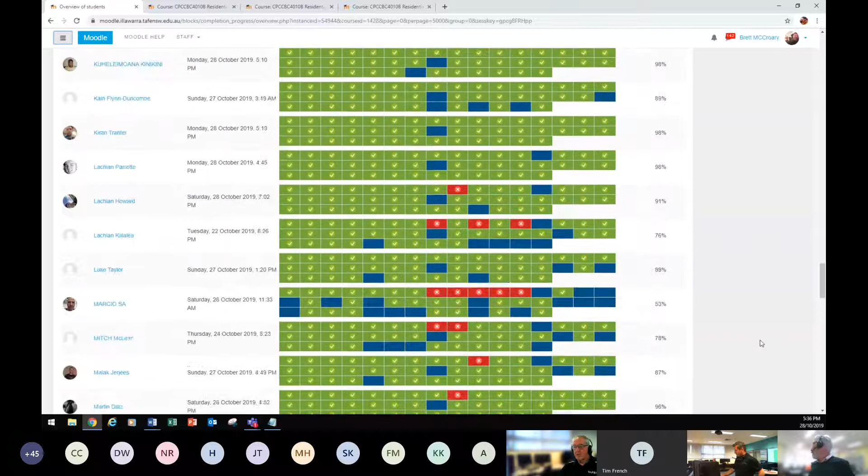I'm just scrolling down because I really don't like showing other students, but just so you get the gist of it, this is what we do. We go down and we look at the end of the year and we check, right? Then we also go into someone's access for their work, just solely them, and then we open up some of the learning activities and have a go at this. This is an example of a student who submitted something that went green.

Calculating live loads worksheet - they've just actually submitted the document and not done the work. Now that's great, the thing is it goes green, but that doesn't actually mean that we know it's done. It looks green, but we still go in and check it. Does that make sense?

And see those calculations - they're questions that'll be at the end of the year. So if you've done it, you're going to have a very good understanding and you're going to probably kill the test within a couple of hours. Those that haven't, you're going to be going, oh my God, it's green, but now I don't know how to do the quiz. Does that make sense, everyone?

Okay, so we actually see that. Yeah, those are the things that - I know a couple of years ago a student didn't do it properly, and he had to come back.

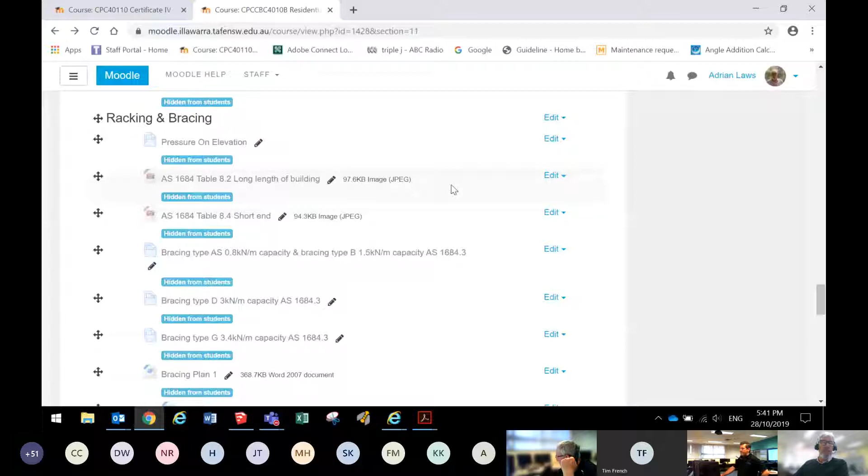So tonight we've got quite a few things I'm going to open here. I'm going to make available to you an actual calculation sheet that you can save into a file somewhere and get ready for when you're doing the quizzes for this unit. So at the end of the night, we will have done a few quizzes.

We'll look particularly at cyclones and some cyclone damage. I'll show you some information on some of the damage from Cyclone Yasi, I think it was, and a few others that we may have to be aware of if we build in some areas that are north of us.

So what I would encourage you to do, if you want to make it real quick and easy for yourself for the quiz, is set yourself up a little folder somewhere. You can see I've called this particular one Structures Cluster, and I would set yourself up a little folder somewhere on your computer for information that'll help you with your exam tips. So I think someone else has grabbed the screen here.

That's not me there. I think I'll just grab that again.

Set yourself up a folder that you can find quickly and easily for when you come to do your exam. You can right click anywhere in the white space when you're in a folder, then get yourself a new folder, and I'd call that 'exam resources' or something like that. That's where I'd put my Australian standards.

I've got all my Australian standards here, so you need to make sure that those Australian standards are active and they're not coming up as a green screen, ready for when you go to use them.

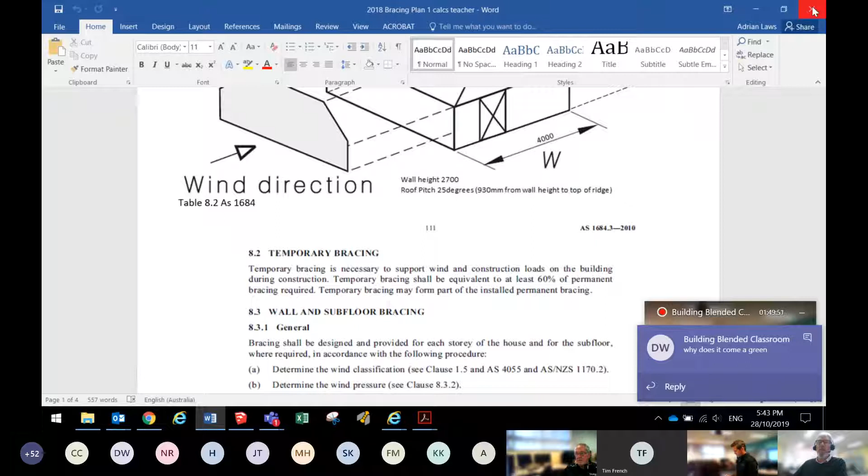I would also put in there any cheat sheets that you might have. I've got some cheat sheets, here's one for example. I'm going to give you this sheet tonight, and I'd be putting something like that in there because it goes step by step through how we can do our bracing and all those sorts of things. If you've got that handy and you get a question like this in the exam, which you will, then you're able to quickly use the calculations from the exam question with the exercises you've got and make it into something sensible.

Now, thanks for answering that question, Brett. Basically, there's a restriction that will come up as soon as you download an Australian standard, because they're designed to be the most up-to-date that they can be. So if you just download them as a straight PDF document from the website, they're going to go green after a couple of days.

If you look back at a few activities we looked at earlier, we said you can sometimes bypass that by printing the document to a PDF, and I think most people have been having some success doing that. Just click on print, and instead of sending it to your printer, send it to Adobe PDF or Microsoft Print to PDF. Most people have that on their computers, and then you'll be able to save it as a document that'll be useful for you.

So tonight, what I want to talk to you about is I'm going to open up a picture for you, and I want you to type into the chat box and tell me who lives in a house like this.

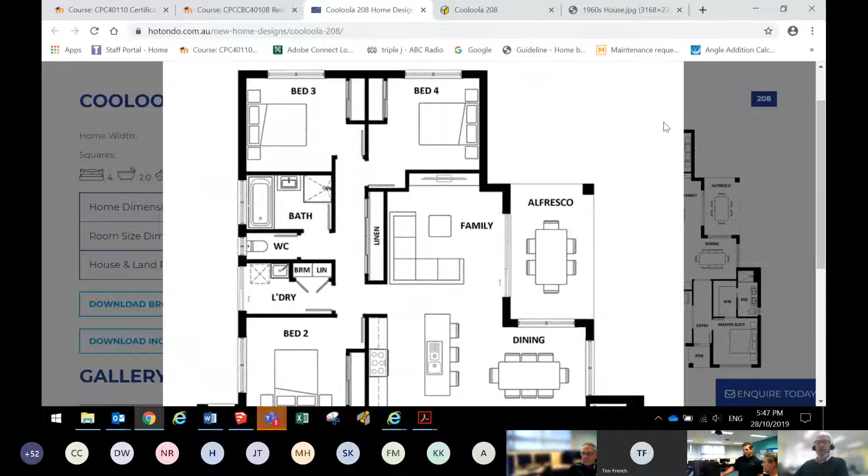Usually that's quite open on modern homes. We might fit some bracing down here, and a little bit in here, but then we're right inside the building, which can make it hard to stabilize the side of it. If we think about this building, the wind can come from two different directions across the building, either from the left or right, or from down this part of the building or from the front. So we have to put enough bracing in there to resist the forces of the actual wind blowing against it.

Now we're going to calculate tonight what the kilonewton forces potentially could be for a particular site somewhere in Australia of our choosing, so that we can design how much bracing we need on that building. But if you look at that building, it's quite different to the previous one I showed you. With this one, we've got lots and lots of spots where there's room for us to put bracing. This one here, we don't have many spots at all.

Look out the back here, that's all so open plan. How are we going to brace that from the wind coming against us this way? We've got a wall here we could potentially use, and a wall over this side. Potentially that wall in there could be a bracing wall, but it's quite hard for us to brace some of these types of buildings. So that's one of the problems we have when a building is built like this.

So let's have a little walk through this building and have a look at what it looks like. If you look around, you can see there's really not much wall space here. This one beside the garage, maybe. We come back into this room a little bit - and this is thanks to Hotondo, you can see on their home site here, Hotondo Homes. So there's not much room on the left-hand side of that window.

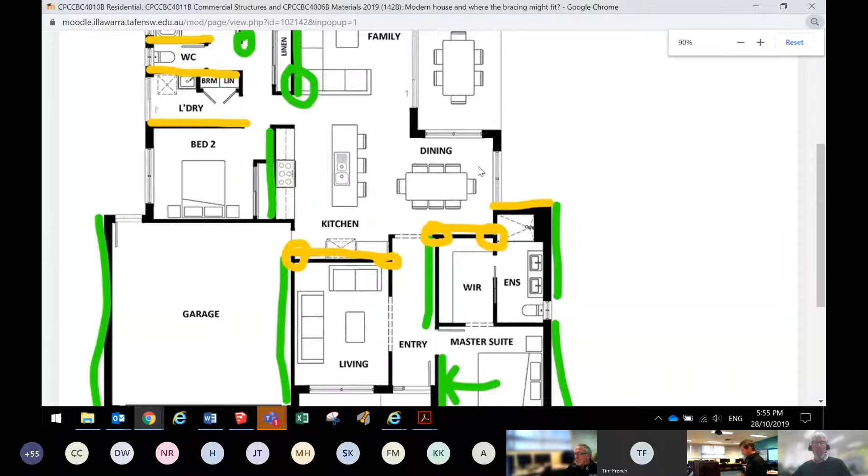Now if we look at the second lot of bracing we have to plan for with this job - I might be able to fit that all on one page - we'd have to plan so that if the wind is blowing left to right or right to left, these yellow walls could potentially be the braced walls. You're not allowed to have all your bracing down one end of the house and none down the other and say that's enough bracing. You can't go more than a certain distance without having some bracing, and this is quite a long distance here.

If we look back at the floor plan for this particular house, I don't know whether it's got measurements in there... no, there's no measurements in there. So we don't know how long that is or how much bracing we might need. That could mean we have to do something special here, because we can't have good bracing here and a bit of bracing there with a big gap in between - that could leave this part of the house weak and subject to failure. So you can see the situation we're up against is a chapter in the Australian Standard that's quite complex, with lots of different directions we can go when looking at wall bracing.

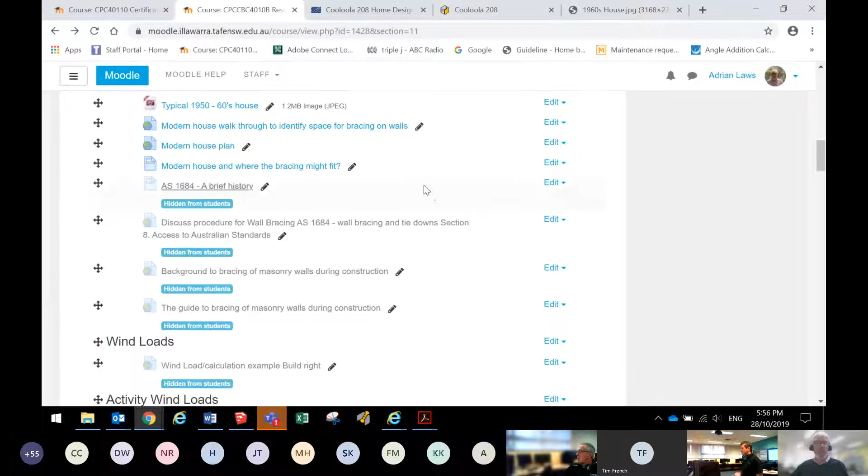Just going to increase the zoom on this once again, bring it back up to 100. So I'm going to show you the next item we're looking at here tonight - this is the brief history of Australian Standard 1684. I'll make that available to you all so you can see it. And anything to do with timber framing of a certain size, we can pretty much go to Australian Standard 1684 to find out things for.

And it's only going to apply to certain size buildings - buildings that are this size. That building there is okay, as you can see on the front. If we look at Australian Standard 1684, this is the type of building we can work on. We'll bring it up to speed here. It's going to be a building of those sizes: 3 metre maximum walls, 35-degree pitch, 16 metres maximum width of the building. So 16 metres is maximum, and that pretty much gives us the footprint of the building that 1684 is going to cover.

What happens if it's outside of that? Then we've got to get an engineer to specifically design it using the knowledge they've learned. Remember, engineers go to uni for 4 years minimum full time to learn how to do these sorts of things, whereas we're doing a course 3 nights a week for a month and a half. There's no way we're going to know what they know - we're just teaching you how to read the documents those people can produce.

You can see here, in around the 70s we had small rooms, small openings and windows, plenty of room for bracing in post-war and through to the 70s. Then we had the light timber framing code, slab on ground construction, roof trusses, open plan design. In the 80s, we had bracing and tie downs.

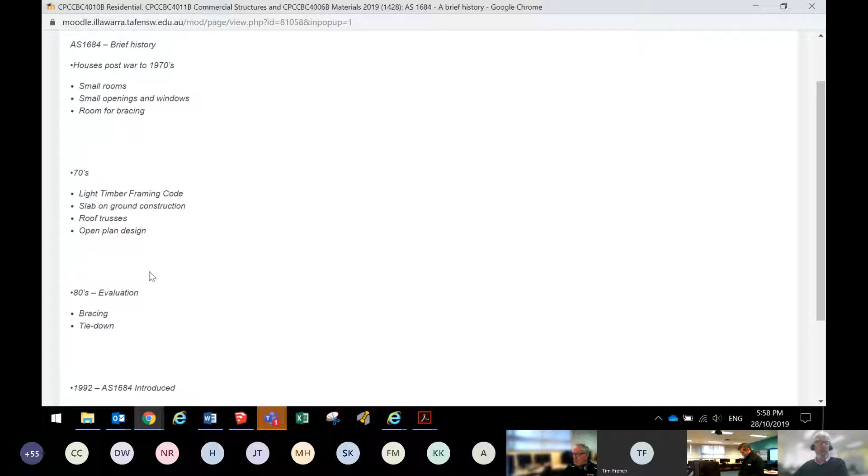Back around the late 70s and 80s we didn't have the books like we have now, the timber framing code, but we had some guidance booklets and documentation. Back in 1992, I've got the first book they brought out, the Australian Standard. It's a bit tattery now, but they started producing that as a book. Then when the internet came in, solidly after the 90s, into the 2000s, they started producing it as an online version.

That's where we can get it from now. So it changes from time to time, and we need to make sure we get the latest update when we come to getting our Australian Standard. That's where we get the information from, and it's really comprehensive. We're going to have a bit of a look at it tonight and actually do some practical exercises in how to work out bracing. So I'm just going to show you this next section here.

What I want to do here is discuss the procedure for wall bracing, Australian Standard 1684, and tie downs, and I just want to touch on it briefly when we look at it. So you can use that link to go to your Australian Standards, or you can go right to the top of the page where we've got a link. I find this one works really good, just takes me straight to it, but you should have somewhere there 1684, somewhere you can quickly access it. If you save it as a print version you probably won't have the bookmarks on the side, but you can still access quite quickly the parts to do with bracing and anything we're going to be dealing with.

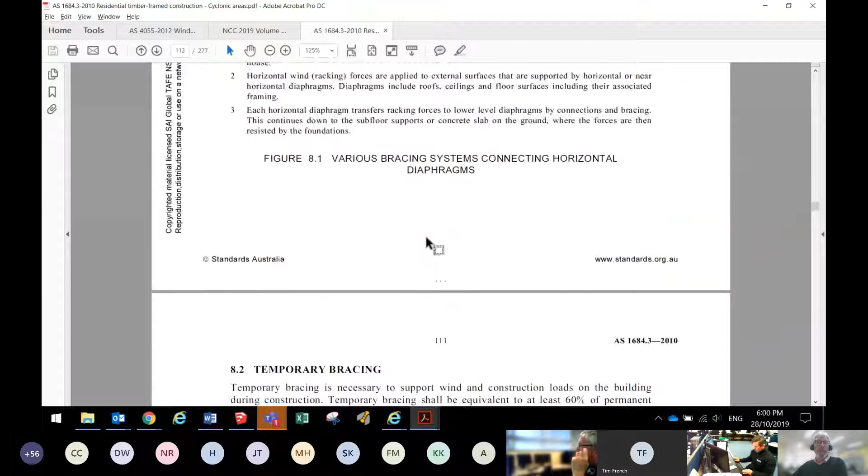We're going to be dealing with section 8. Now I'm just going to quickly give you an overview so you know how it works. There's section 8 where it starts, that's page 110 out of 277 pages. So basically if you go through this book, it's following it from the start of a building, after a couple of chapters of introduction, right through till the tying down of the building. Pretty much you need to skim through this before you do your exams, just to make sure you've got an understanding of where you find things.

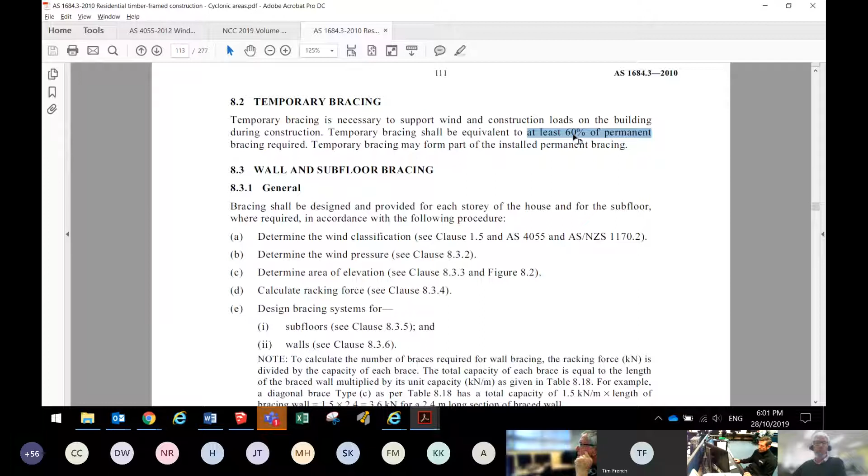So this pretty much is going to tell us, if you look at the headings here, some of the different systems, and then we come to things like temporary bracing. You can almost guarantee that particular information is going to be an exam question. The point there is that 60% of the final bracing that we will calculate tonight as being required to hold a building up needs to be in place at the end of each night when you go home, once you start standing walls. So anything that could fall over, 60% of the final required bracing needs to be in place to hold it. That's what the requirement is there.

And when we look at wall and subfloor bracing, this part here is probably the best thing you could refer to, and I've put it on the activity for tonight so you can see, because it's going to go step by step exactly what you do to work out what your bracing requirements are. It says bracing shall be designed and provided for each story of the house and for the subfloor where required, in accordance with the following procedure.

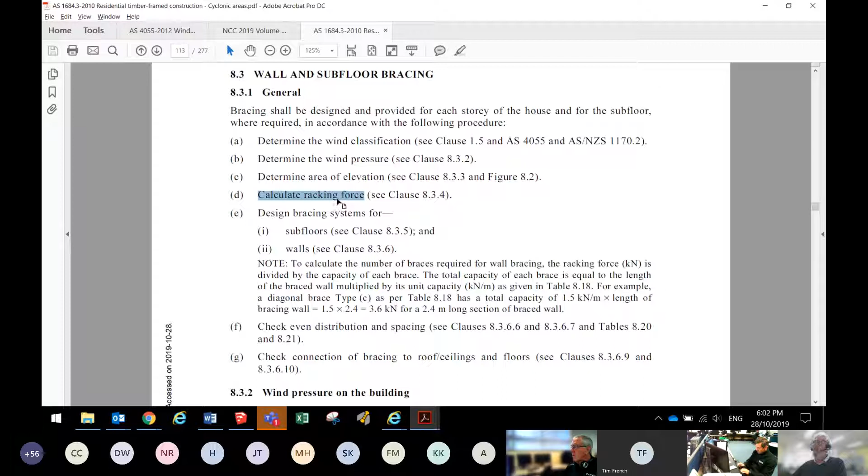First thing you do is determine the wind classification. Then you determine the wind pressure. Then you determine the area of elevation, and you calculate the racking force. We haven't even looked at bracing yet. What we do by calculating the racking force is work out how much pressure is actually going to go against the building in the particular chosen direction. And when we know how much pressure is against the building, then we can go searching for a bracing system, in our case for walls, to be able to resist that force that we found out we needed when we did our calculations.

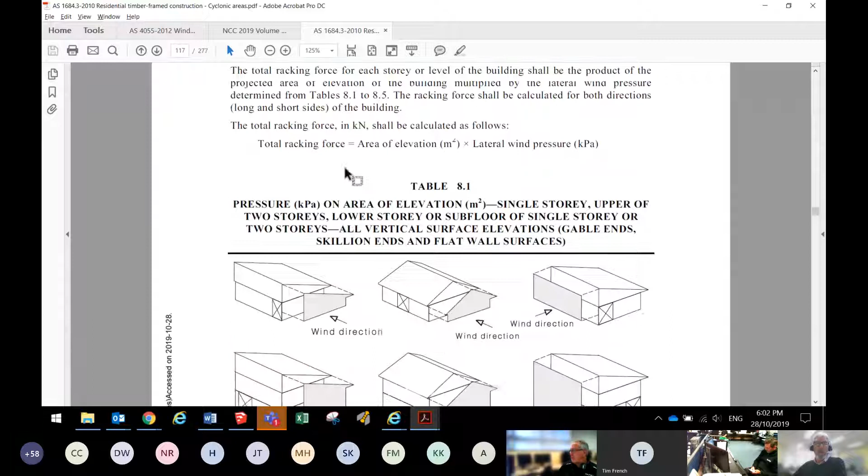Okay, so D and E is where we spend our time. We do whatever we can to get to D, which gives us a reading—I'll show you what the reading looks like. So clause 8.3.4, just go down here till we get to 8.3.4. Here we are, this is what we're aiming for. And the reading we're going to come up with is going to look like this, one of these numbers here.

Just check here, pressure in kilopascals. So we're going to come up with a reading, and the reading is done by little calculations as we go through. Actually, that's the racking force, clause 8.3.4, and we'll eventually come back to this chart once we get the racking force.

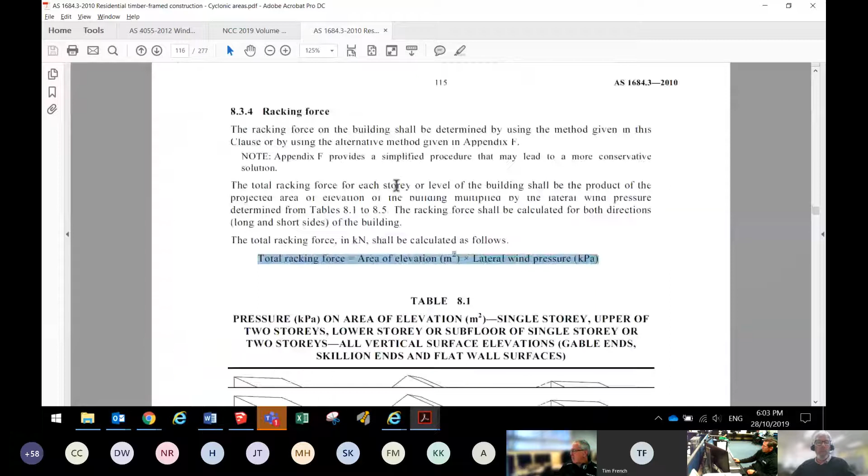Where'd that chart go? Up here. So calculate the racking force, clause 8.3.4. That'll give us a kilonewtons force. Once we get the kilonewtons force, we can search down our table for finding some bracing that'll give us the strength we need. There's a table in here which gives us all of that.

We disregard subfloor bracing for us, because you're going to have enough of a struggle working out. We'll work hard enough just working out the wall bracing for this one.

So just want to introduce you, before we get into wind loads and things, a little bit about masonry walls and construction. There's been some news items about this lately, so we just want to have a quick look and see some of the issues that can come from the dangers of masonry walls and construction.

Recently, one worker died and another was seriously injured in separate wall collapses in Sydney construction sites. Some of the contributing factors were wind, reduced mortar strength in the walls, and damp course membranes providing a line of weakness.

Some of the actions prior relate to the need to ensure the stability of masonry walls during construction or demolition work, because masonry walls can be used as bracing and things like that too. So that's why we're touching on this here. It's important, if you're going to use this as a bracing wall, to make sure that it's strong.

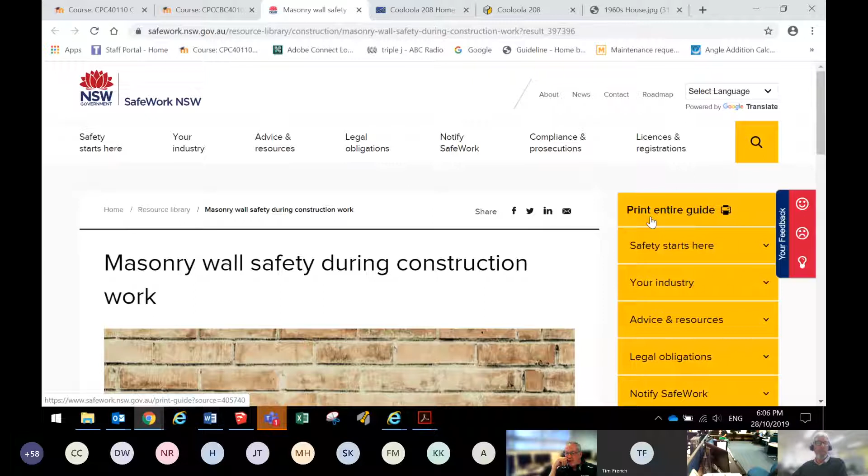You can download the whole guide if you want to, but let's have a quick look at what this guide says. So: introduction, plan and prepare, identify the hazards, assess the risk, control the risks, establish the no-go zones.

With the no-go zones, that's where nobody should go - areas where you can see here, ensure that any no-go zone extends at right angles to the wall on both sides, at least a distance equivalent to the total supported wall height plus 1.2 metres. If winds exceed fresh winds, establish a no-go zone.

There'll be a table there, and this is pretty much a click-through document which will help people identify how to make sure that any masonry walls being used, particularly in relation to bracing and construction, will have some controls in place so that people don't get injured.

Pretty much the rule is with most local government councils that anything that goes above 1.5 metres high will need some sort of approval or engineering design, because it can be pretty dangerous if anything is too high. If it's only real low, it's not too bad, but if it gets too high, then it can be a problem.

Now I'm going to make available to you this Build Right activity, which we've become a little bit familiar with as we've been working through this set of units.

There's quite a bit of information here that's fairly introductory in relation to bracing. This particular one talks about things we're already familiar with, like different wind loads, the effects of forces, and different types of bracing systems we've spent some time on.

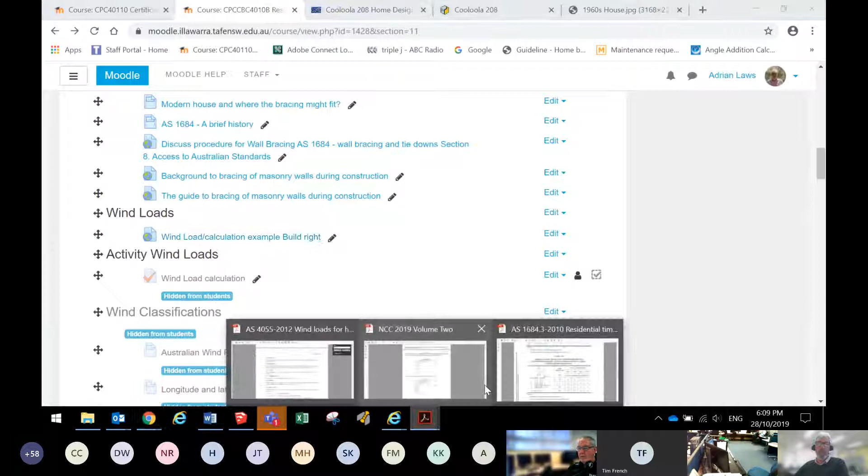For nominal wall bracing, I'm going to take you straight to the Australian standard where we talk about nominal wall bracing. I'll just duck back up to find it—I'm at the beginning of this chapter.

I'm going to do a Control F search and type in 'nominal' to find some hits for this word. Here we go—here's nominal wall bracing. So we have two types of wall bracing.

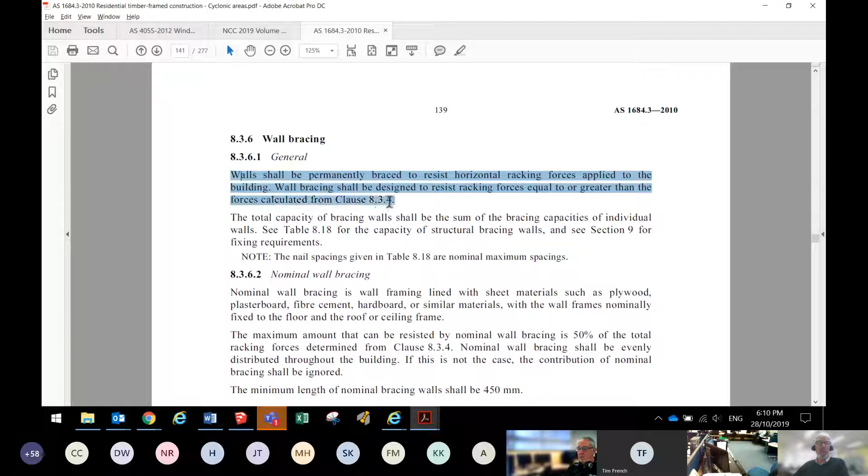Walls shall be permanently braced to resist horizontal racking forces applied to the building. Wall bracing shall be designed to resist racking forces equal to or greater than the forces calculated from clause 8.3.4. The two types of wall bracing are either nominal wall bracing, which is the wall lining material with sheet material such as plywood, plasterboard, fibre cement, hardboard, or similar materials.

That's called nominal, and you're allowed up to 50% of the total bracing required for a building to be achieved from nominal wall bracing. Structural wall bracing is the other type allowed. The maximum amount that can be resisted by nominal wall bracing is 50% of the total racking forces as determined by clause 8.3.4.

So this is the key thing I want you to get into your head right now: we've got two types of bracing that can resist all those wind forces. One's nominal, which is normally the plasterboard or fibre cement sheet that you're going to put onto the building.

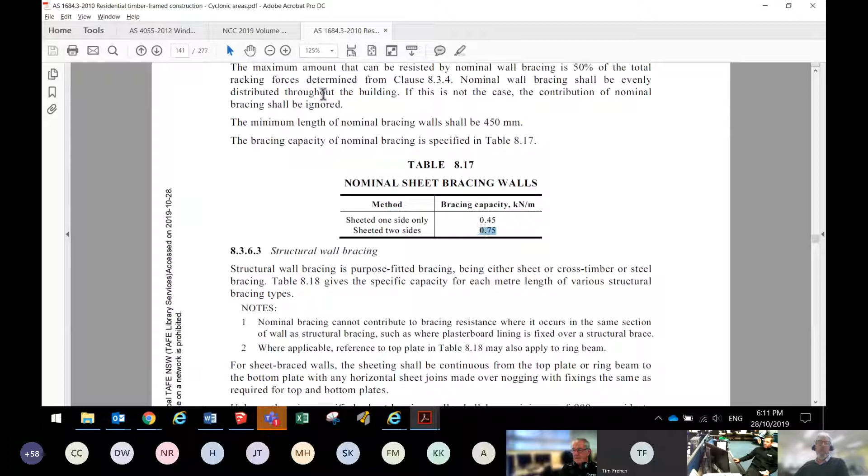If it's an internal wall, your nominal bracing calculation allows for plasterboard, fibre cement sheet, or things like that. If it's an internal wall sheeted on both sides, you're allowed 0.75 kilonewtons for every metre of wall.

If it's only sheeted on one side, you're allowed 0.45 kilonewtons for every metre of wall. So let's put this into an example here.

If we knew what the length of that wall was there, running through here, let's say that's a 4 metre wall - it's a reasonable little house this one. Probably more like 3 metres actually, because it's probably going to have a 3 by 4 bedroom there. So if that's a 3 metre wall, we're allowed 3 times 0.75 for that wall in nominal bracing.

Let's see what that comes to, just so you can see how this works. So 3 times 0.75, that's going to give us 2.25 kilonewtons of bracing right there from that wall.

There's only one thing we have to remember though, and I'm just going to try and see if I can see it here before we go too far. I'll tell you about it, and then maybe you can find it and tell us. The minimum, two things actually. The minimum length that we can claim for bracing in nominal is 450.

And the other thing to remember is if we're claiming nominal bracing on a particular wall, like this one here, for example, we can't then go and slap some structural bracing on and claim structural bracing plus nominal bracing. You've got to choose either one or the other.

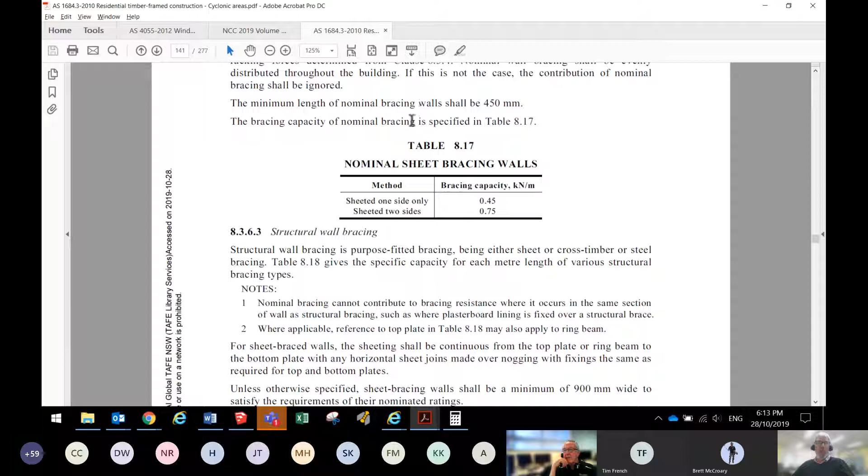Obviously you choose the one that's going to give you the most. So if you can't get a structural bracing that's more than 0.75 per metre or 0.45 per metre, then you'll go use your nominal. In most cases structural is going to give you more than that per metre.

So structural wall bracing is spoken about here, and that's the majority of the job. And here's an example you can see here.

Look, even the simplest structural bracing, which is 2 diagonally opposed timber or metal angle braces, consisting of 45 by 19 millimetre hardwood timber bracing fixed to each stud and plate with 150 by 2.8 millimetre diameter galvanised flathead nail. If you do that with a minimum of 1800, you've achieved 0.8 kilonewtons per metre.

So if you've got 1.8 metre and it's 0.8, let's do the math on that. 1.8, because that's the minimum you can have, times 0.8 - you're already going to be higher than the other one. If you go 1.8 times 0.75, you're going to be better off to go with something like this.

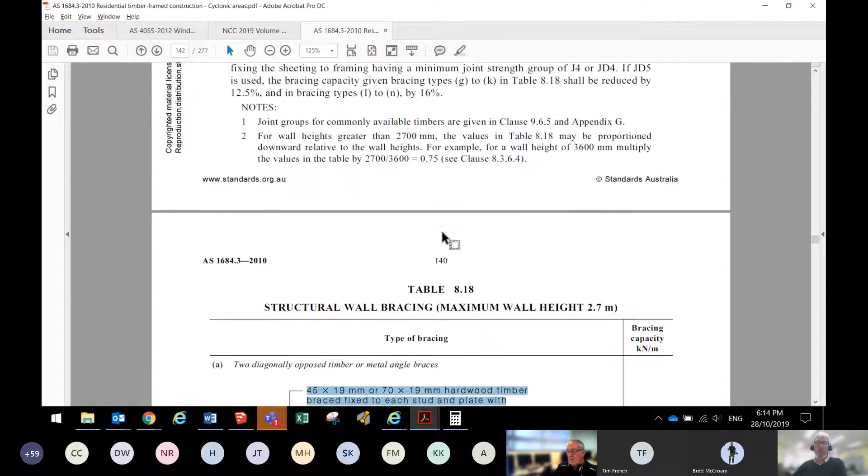So in pretty much all cases, you're better off to go structural if you have a choice of structural or nominal. But the good news is we can actually use nominal for some areas where we don't want to get structural. So this one here, we'd probably go nominal.

And with this building, you'd probably find that these engineer designers have used nominal for all these internal walls here, maybe even that one, maybe not, and these internal walls, and they're able to allocate that as part of a bracing member for the building.

Now, if they're using this one here, they're going to have to fix the trusses to it. If they're using some of these ones here, then they could be fine for adding to the bracing requirement that we need for that particular job. So that's an example of how that works.

Let's just move on to our first little completion activity that we can do here. We're going to do a quick wind load calculation. I've got a little bit to do tonight, so pretty much what you're going to do is use the plan that's supplied and you can actually answer those questions.

So I've already had a bit of a look at this one. I'll just pop that into another screen. I'm going to let you work on that yourselves while you're listening to me in the background. If you do that, just look up every now and then, and I'll try and highlight with you what's really important for you, so you can just stop doing your quiz and jump onto having a look at what's really important.

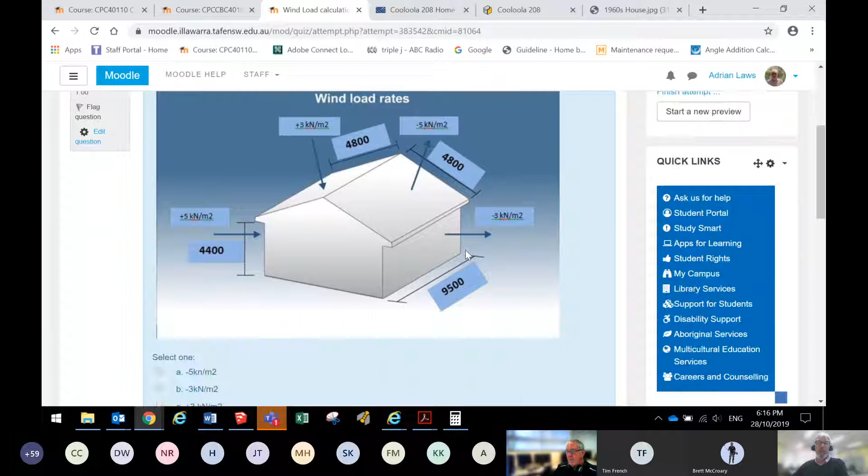So if you look at this one, it says what is the wind load rate on the leeward wall of this plan. So leeward is over on this side, and what is the wind load rate, and you've got to go through and do the calculation there.

So it's not too bad really. It's just get a calculator and go 5 plus 3, that's 8, minus 5 brings you back to 3, and minus the 3. You're just going to work your way through there until you come up with your answer. We did have some example calculations of that earlier.

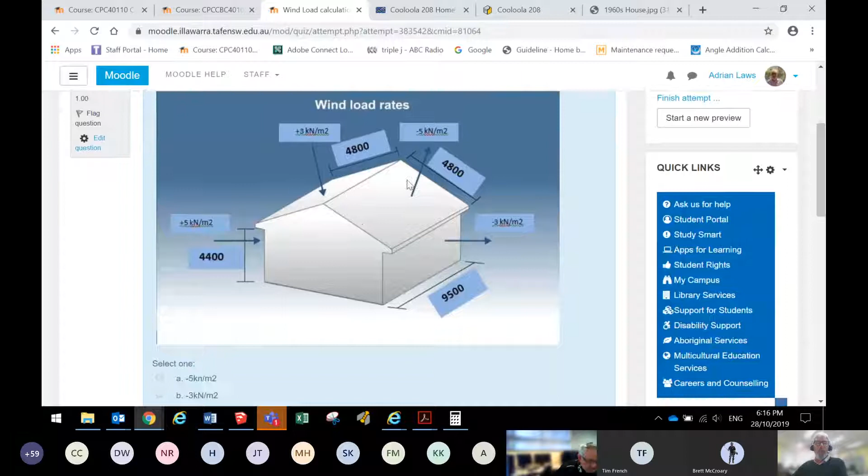You have to actually work out the area of that wall and work out the roof areas and things like that, so you're able to come up with your calculation and work your way through those activities. All of these questions, about 4 of them, are all just relating to that little sketch you can see there. I'm going to let you keep working on that. If you're all good with that, I should have left that little heading open.

So what I want to do now is actually go to an example of some wind regions and show you how we come up with one of the first things that we need to come up with on the Australian standard, which is our wind rating.

As soon as you start looking at these charts, one of the first things you come up with - go back to the beginning of chapter 8 here - step 1 is determine the wind classification. We can gain that from Australian Standard 4055, or New Zealand Standard 1170, which has a repeat of the information. So we have to determine a wind classification, and then we work in from there. A fair bit of tonight is actually going to be about wind classification.

And to do that, we need to have a site somewhere in the world where we can do it. So I've opened this up for you, and I think that's going to open up a little introduction to that.

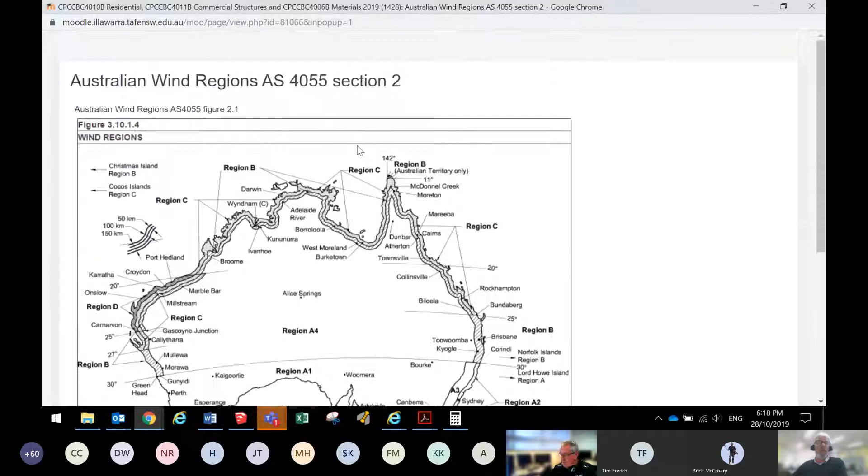You remember this little chart that I've shown you a few times already, and that's Australia. You can see there's your different regions in Australia based on the wind. Each of these little sections is based on the potential strength of the wind in Australia, and we choose our region, anything through from our D's, being the most severe, back to our A's being the least severe.

And we follow a little process where we talk about how we finally come up with a wind rating. Now, one of the things I just want to bring up with you, because we have that chart there, that map of Australia, which is the very first thing we're going to come across as soon as we start to look at Australian Standard 4055, is I want to talk to you briefly about longitude and latitude and the implications this has on the siting of a house and the building of a house.

So the thing here is that ultimately the Earth has been divided up into 360 degrees, then broken up into minutes and seconds underneath those degrees, but basically 360 degrees. And it all starts from where you can just see a picture there of the right-hand side of England. If you go over to Europe on that map, you can see I've got the little pointer there, just on the right-hand side of England.

Can anybody type into their chat pod the town in England where the Meridians of Longitude start from? Let's see who knows that one, who the smarty pants is, who understands that one.

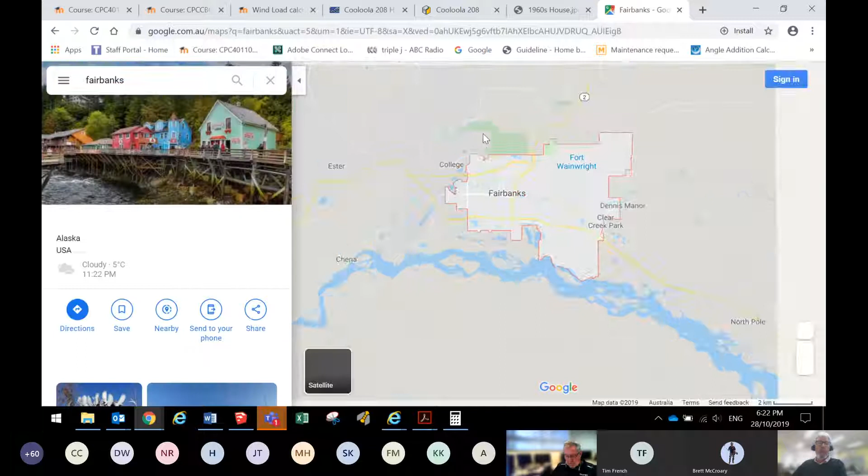There's some things that I noticed - they build the houses a lot differently because of this. Where we live in Australia, if you're over on the coast, we build houses so that we can let the light in, let the air through, and try and have as comfortable a house as we can, based on the type of temperature of where we are.

So we're just going to skim right out so you can see where this is. Just don't get too dizzy. Hang fire for a second while I set you up for it.

So you can see here we are over here in Australia, and the equator's sort of up through here somewhere. Mostly we come down here around these regions where I showed you the high winds start from, sort of Port Macquarie, Coffs Harbour, that area north, Geraldton over in West Australia, and anywhere on the coast it follows up there.

We need to design houses so that they let the air in, but they're also really, really strong so they don't blow apart, because we get such bad winds. Down around the coasts around here we can get bad winds, but inland it's not quite so severe and so bad.

Once we start getting south, this is probably 30 degrees here, this is probably 40, maybe 40, that's probably 30. I think Hobart's about 35 or 36 or something or other. Then we get cold winters, and we can get warmish summers. But the biggest thing we're trying to do is keep the houses warm and try and be energy efficient with our warmth.

When we get up around Alaska, where they only have snow for 9 months of the year, pretty much what we need to make sure we've done there is built a house that can withstand the extreme temperatures. So they actually test their houses to make sure there's no leaks.

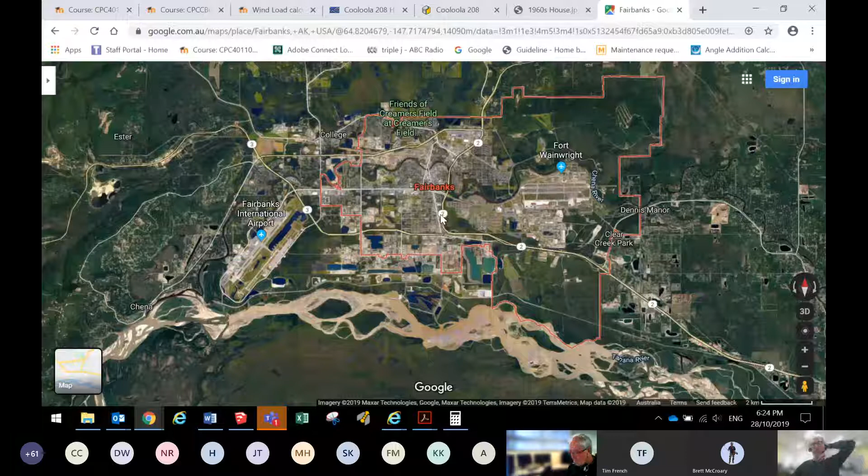Up there, they have sun for basically 24 hours a day. So when we were up there last year, at 11 o'clock at night, you could read a book outside - it was just so bright. So they have to build houses a lot differently in some of those areas.

So longitude and latitude has a lot to do with where we build a house and the type of house we build. That's why they build houses like this, and lots of times they were really, really uncomfortable houses to build in. Then along comes builders these days where we build houses a bit more like this.

All of these houses have to be built to the codes and to the standards, and the standards have been designed so that they match the type of areas where buildings are going to be built. Okay, so I'm going to just show you a quick extract here from Australian Standard 4055. I think that's going to open up.

You can see here that the classification is for wind loads in buildings based geographically, and also where it is in the street, based on 10 different classifications. We've got N1 to 6, and then C1 to 4, and we could think of the C as being cyclone.

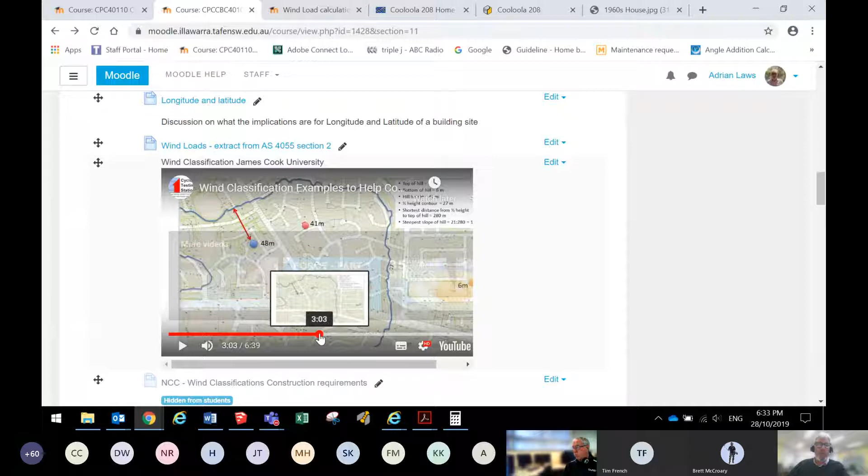What I said to the guys here when we were watching that video, it's really important that you have a look at how he had set that out. I'll just quickly set it up - I don't know whether I can actually show you. You can see basically how he set that up. He's had on hand some specific information.

He's had an address in Australia, a street address, a topographic map, a printout of it so he can put a text mark around the page and draw lines and take measurements so the map is to scale. He's able to work out slopes of hills and things, and then he's got the Australian standard to work it through from there. So that's the type of thing we're going to be doing on an actual plan.

Just going to quickly show you a couple more things before we actually get into it. In this particular example here, this talks about how there's special applications for high wind areas - we have to be careful of that. There's a part here on 1684 which talks about high wind areas, and you can actually read that through.

Then there's another one here highlighted, which talks about some more explanatory information for additional construction requirements. Each different state has their own requirements, and this one here is where they talk about rigorous testing for metal fatigue, and things like that.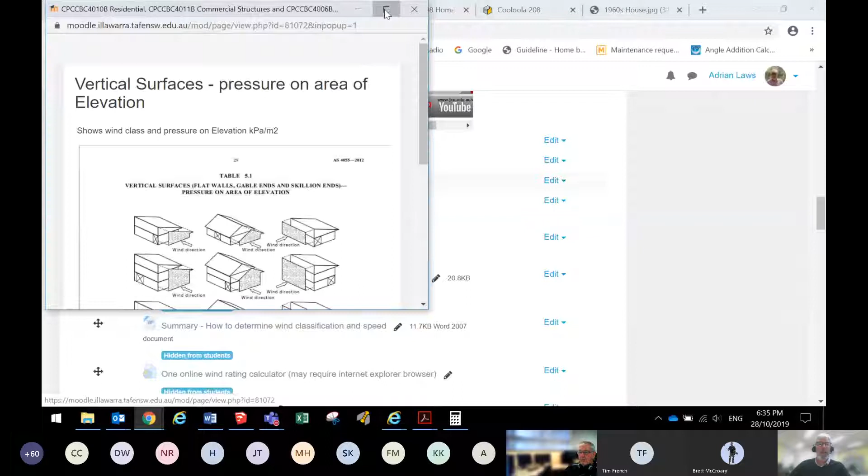Now, the next one I'll show you is an example of the pressure on the area of elevation. One of the things we've got to determine is the wind direction, and we have to work out the pressure on the area of elevation. This shows you the 10 different wind classifications and an example of the pressure - vertical surfaces, flat walls, gable ends and skillion ends, pressure on area of elevation.

You can just choose this table in this example as your basic amount that you use, or if you want to fine tune your bracing, you might think, oh, ours might not have eaves on the right hand side, or it might have smaller eaves, or it might have this or that. You can go through and fine tune it, and you might be able to save a little bit of kilopascals on your pressure so you can reduce the amount of bracing that's required.

And if you're building a lot of houses, you would probably do that. Otherwise, you would probably use this very first chart that covers all the different types of houses that are going to be exposed to wind - we'll choose and work on the different pressures and things there. So there's examples of that.

Now I'm going to show you a couple of quick things. I realize a lot of you have jumped straight into the quiz and probably aren't listening, but the information is here and you'll need to come back through it yourself. I want to highlight a couple of resources that can help you if you get stuck, and I'd advise using them as a backup. Always use two systems to do these calculations if you can, so check your work, because you're going to spend real money once you start building a house based on the bracing system.

Here's the first one. This is basically a summary of Australian Standard 4055, a design guide from Stratco. You can see the map of Australia, and you determine whereabouts you live and where you're going to work, and pick a spot there. It says to go through and choose the region in Australia, then choose the terrain category. There's a summary straight from Australian Standard 4055, using the same wording and almost the same pictures, maybe drawn a little differently to avoid copyright issues. That's the terrain category, and there's the topographic effect.

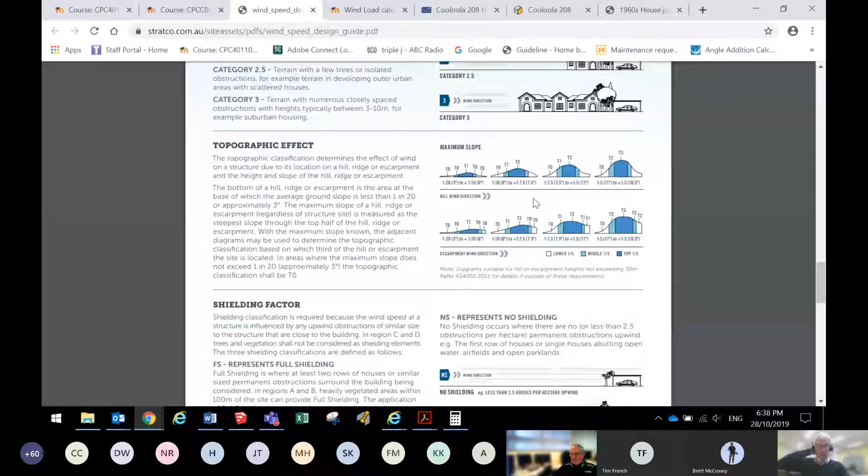What I like about some of these documents, which supplement the Australian standards, is that you have to check whether they're still up to date since they don't get updated like the standards do. But it gives a really good graphical presentation of the slope of a building, because the topographic classification determines the effect of wind on a structure due to its location on a hill, ridge or escarpment, and the height of the slope.

So obviously if it's on top of a hill, it's going to be a lot stronger than on the other side of the hill.

I don't know if anybody's climbed Pigeon House Mountain or some of those mountains over on the coast with a fairly flat top. But if it's blowing a gale and you get just over the edge, on the lee side you'll find there's hardly any wind, because that's what happens with escarpments, and that's what this takes into account - on the way up the hill and certainly on top we're going to get a lot of wind, then there's a little swirling effect right over the hill, and sometimes that's taken into account here.

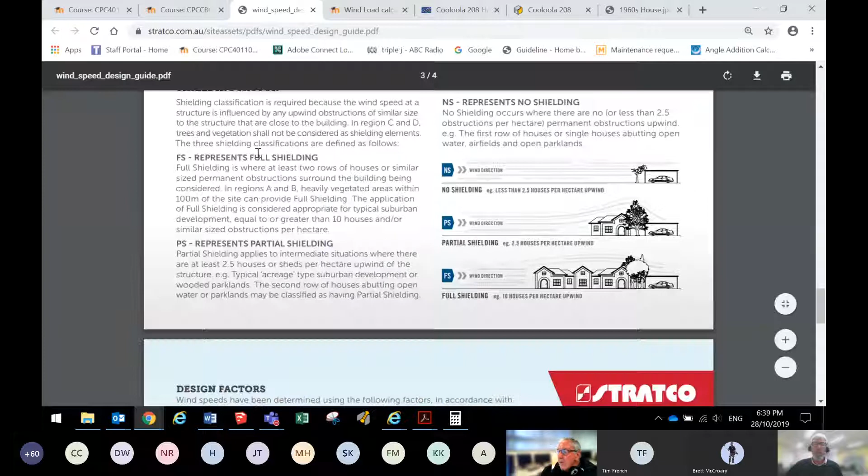So we've got different choices to make here, and we put it into a table to get our wind factor. Then shielding looks at location - is it right beside Lake Illawarra where it's open and the wind can build up speed across the lake, or is it hidden down in a little suburb somewhere so it won't gain speed?

That resource we've put up is just a real quick, good summary of wind, how to determine your wind classifications. There's also a PowerPoint here that I'm going to make available to you, which goes through the same types of things. So there are heaps of resources for you to do your research, because you're going to spend a fair bit of time just going through and doing your classifications. There's an example of that, but I'm not going to spend time on it now.

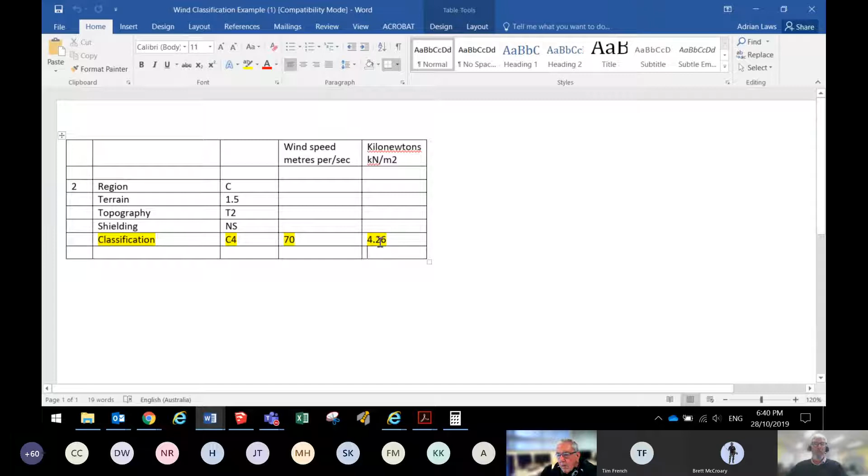I want to show you the end result of determining the wind classification. Here's a document I'll make available to you, showing the end result once we work out our region, then our terrain category, our topography, and our shielding, and we're able to arrive at a classification - in this case C4. And if you needed to know the kilonewtons or the wind speed, you could work that out, but that information becomes clear once you start looking at the documents.

So that's a summary - there's a summary document here on determining wind speed using this resource.

So this one's going to give us a quick overview of summary: wind region, terrain category, topographic shielding. So that's put up there for you. And then the very last thing, which you'll...

Find hopefully quite helpful, you may need Internet Explorer for this one. I'll see if it works on Chrome, possibly not. Oh yeah, it might work. No, it's not going to work. So I'm just going to copy that link and put that across to my Internet Explorer, because here's a little calculator that'll actually do the classifications for you.

And like I said, you need to check all of this, because who knows whether Sheds Online's all up to date and taken the latest updates and things, but there are calculators and things that can help you.

So obviously if we're in New South Wales, and let's say we're over here somewhere, we can go through and answer the question, select the terrain, and then that'll give us our next choice. So if we select, let's say, this type of terrain, it'll jump through to the next shielding. And this is where we look at our shielding, and we might determine we're in a fairly built up area. We choose that one, and then we select our slope. So you can see this will help you when you look at the Australian standards.

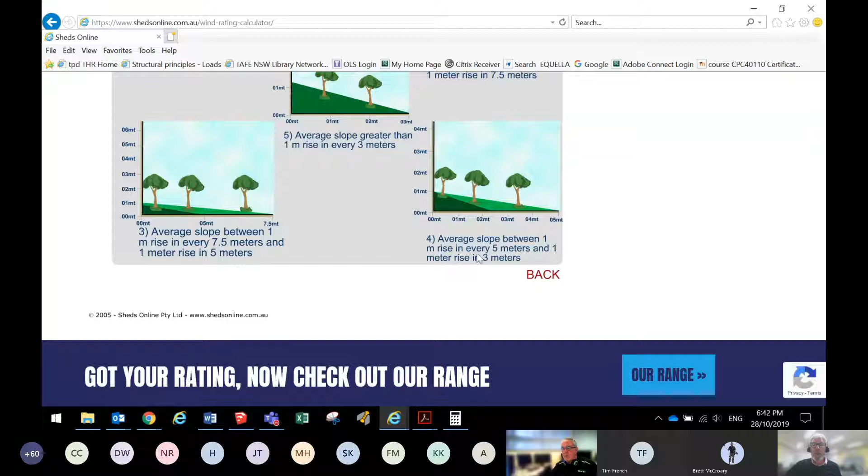There's one choice: average slope of less than one rise in every 10 metres. The steeper one here, what's our steepest slope on this one? Average slope between 1 metre rise in every 5 metres and 1 metre rise in 3 metres. So that looks like that's a steeper one.

Let's choose that one. And then we come back and select the site position. Are we located in the lower third of a hill, the middle third, or the top third? So this misses a couple of things. It doesn't get over the top of the hill, but it does come up with a bit of an estimate and a result.

It's suggesting there possibly terrain, region A, terrain 4, shielding 1, slope 4, location 3, comes up with potentially it might be an N3. It's probably said N3 as a worst case because they're protecting themselves a bit, but that's an example of some of the different types of calculators, and you can use that as a bit of a check if you want.

So what we're going to do now is I'm actually not going to open up that next quiz just yet. I want to show you a little bit of an example here of on this next video about building in cyclone regions and some of the types of things that they've got to take into account as we realise how serious this is, that we get our wind loadings right. Mike.

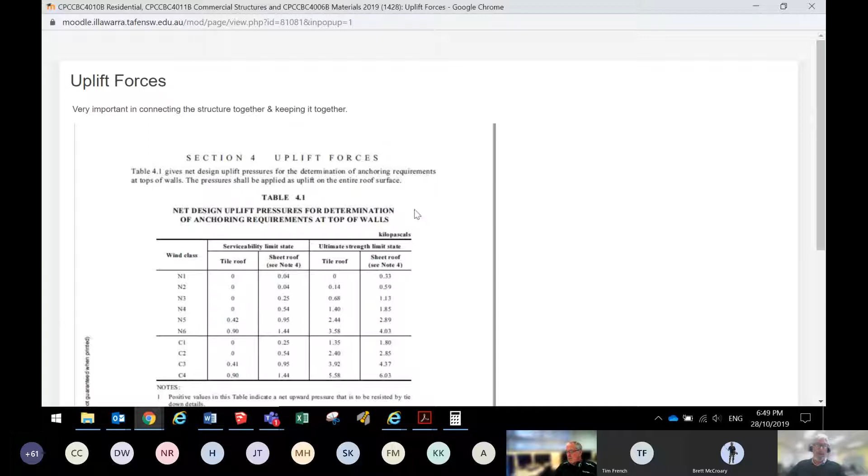When we look at when we get our bracing sorted out, we also have to take into account our uplift forces, and that's where we're going to be looking at Chapter 9 in the Timber Framing Code, where it talks about the uplift forces, and that's where we're still using these same terms here, the kilopascals, the N ratings, and those things as we come into being able to solve the structural requirements for the building.

Another couple of things I'm going to reveal here for you and show you before I show you some scary photos. So this particular one is construction in high wind areas. That's another thing. We have alpine areas and those sorts of things which need to be taken into account. And the intent of building construction in high wind areas is to ensure the structure has sufficient strength to transfer wind forces to the ground.

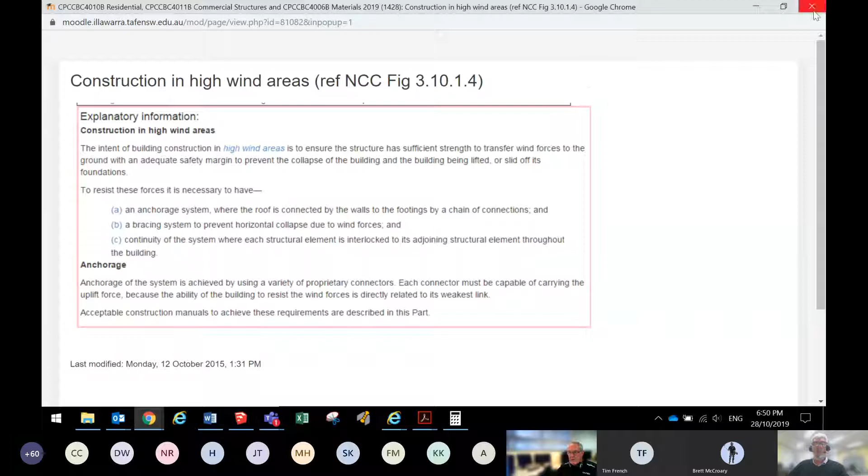To resist these forces, we have to have an anchorage system where the roof is connected to the walls, a bracing system, and a continuity of the system and anchorage all the way down. Just a real quick introduction here to the connection requirements for your buildings. This is taken from Chapter 9 of the Australian Standard, which talks about general connection requirements.

Have a look at this washer down the bottom here. Anybody ever seen a 5mm thick washer? In this particular case, with an M16 bolt or coach screw, the washer size is 65 by 65 by 5mm. That's a pretty serious hole down right there. So drilling for bolts has to be real specific. Bolt holes in unseasoned timber shall be 2mm to 3mm greater than the bolt diameter, and for seasoned timber 1 to 2mm. It's pretty specific, and there's no guessing with how you fit everything together.

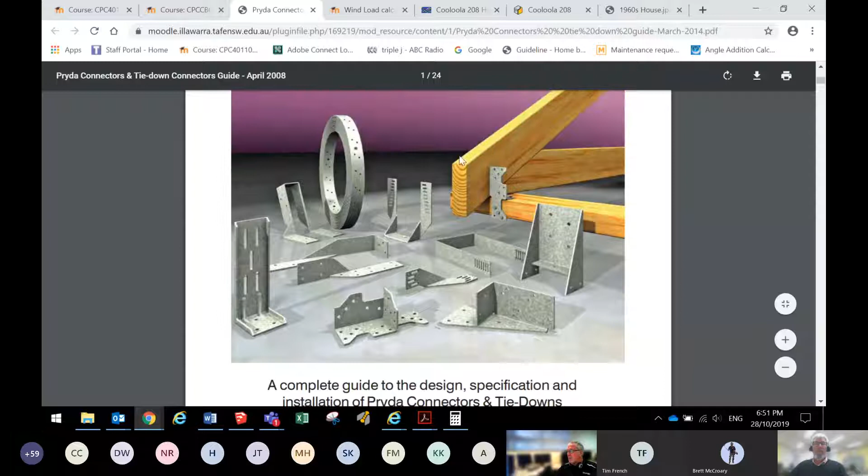The next thing I'm going to show you here is the tie down connectors guide. These manufacturers produce their own guides, and this is just an example. It's a 24-page booklet showing the different types of tie downs they have. Look at them all: truss ties, miter plates. There's ties for anything, and they'll all have a kilonewton capacity.

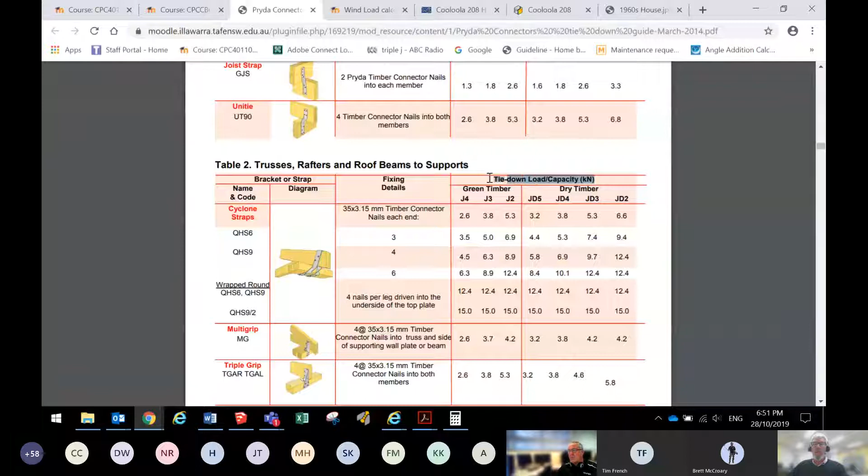They come back to a joint group, which relates to the Australian standards. They'll talk about Australian standards and everything will have a capacity that it relates to. So here's our kilonewton - you're familiar with that term now. That's our kilonewton capacity there.

Another quiz I'll show you in a second. First of all, I'll just show you a couple of pictures of some activities. Here's our pressure on our elevation, and this is where there's a table that tells us how to work out the pressure. In this particular case, we can go through and choose our pressure based on factors you'll see when we look at 4055 and 1684. This shows us the kilopascal pressure based on the size of the building, things like roof pitch, and all those types of things. So we put all that together, and that's how we come up with it.

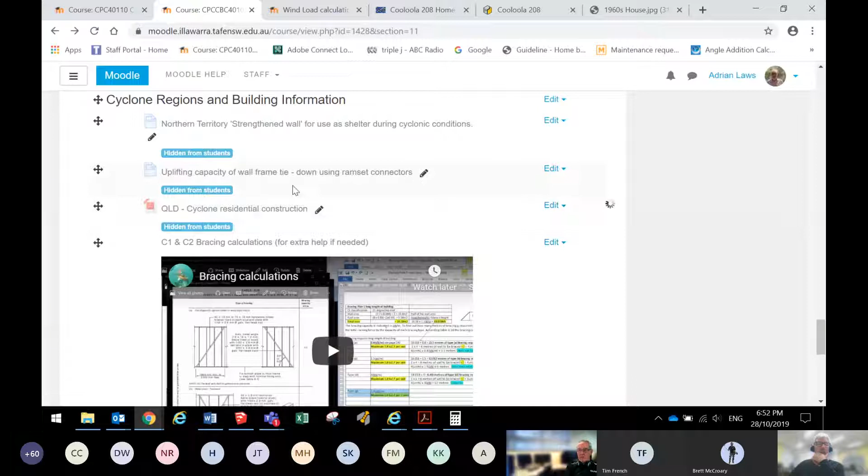Now I want to show you some pictures before I go on to some more of that. I've got a picture down the bottom here which I wanted to show you on Queensland construction, and then we're going to go into a little bit of some more activities there. This document was a 64-page booklet that Timber Queensland put out, and I had a couple of pages I wanted to show you here - this is basically a review of what they put out.

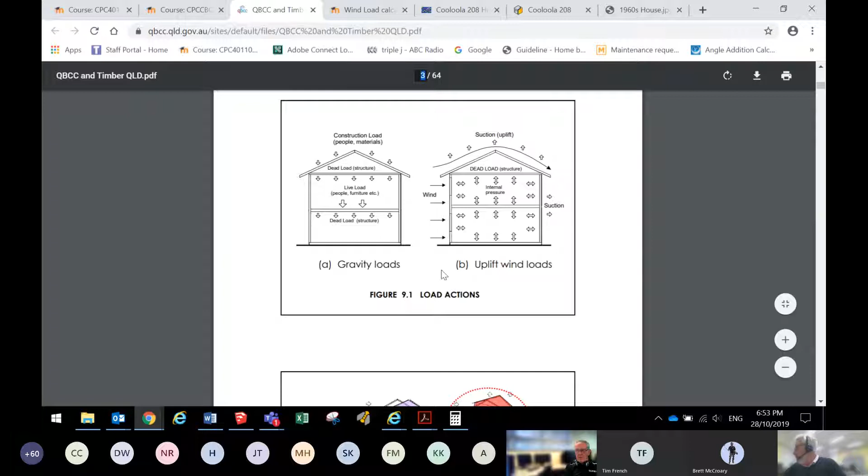It would have been a presentation back in the day, general solutions designed for houses based on some things that have happened in cyclones and different things over the years up there. There's a couple that I wanted to point out to you. So going to just show you page, I think it was page 42. There's page 42.

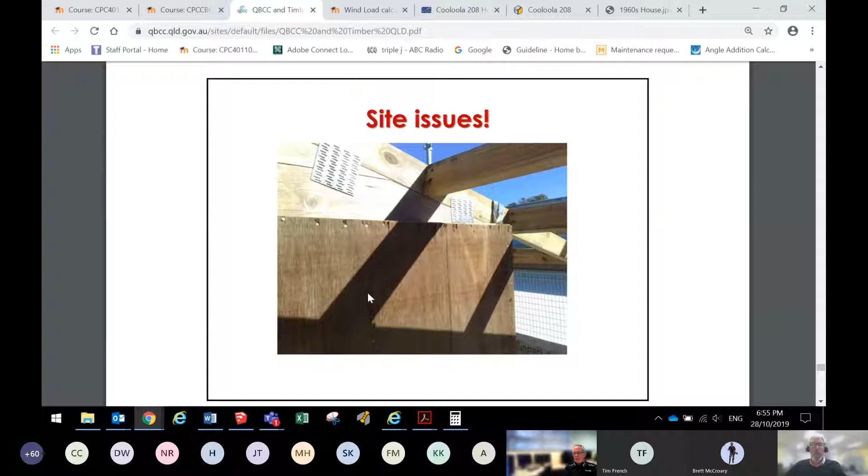So whatever the council has approved as the engineering details, it's important that that's how you build the job. Putting the nails a certain distance apart on the edge and a certain distance apart in the middle is part of the specifications given to you. It wouldn't be acceptable for somebody to punch a hole through the bracing like that, because now we've basically taken that whole section out as potentially useful bracing.

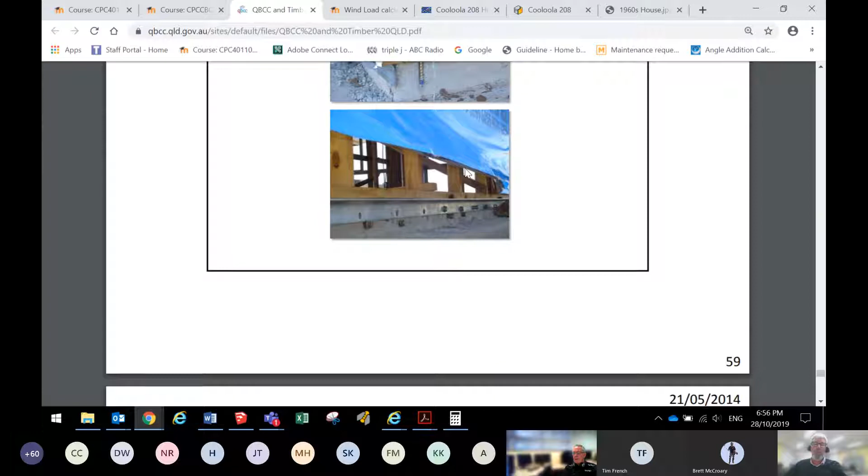What about with garage doors? There's even an Australian standard for garage doors. Normally the garage door installer will be aware of that, but that needs to be taken into account too.

So what else was I looking for on this one? I think there's a couple of pictures coming up showing examples of things that might be the main ones for that. So that's a little document available there for you - it's got some real good useful information in it.

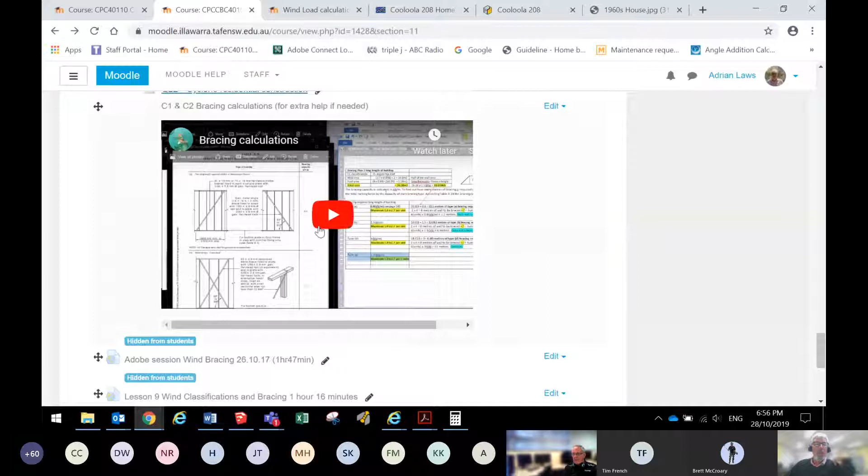Now, I want to show you the last video before I go into some of the activities here. That's available for you to watch. I'm going to turn that one on - it pretty much goes through what I'm going to go through in a second. That's one Brett's done that'll pretty much show you how to do the activities we're going to work on now.

So we'll come back up here to what I haven't shown you - we'll show off some of these. In this particular case, we've got the long length of the building, so we've got some Australian standard. There's some pictures put up there for you - I'm going to let you look through these yourselves, and I'll move straight through to some of the activities for you.

That one there, that's the shorthand - show that one. In this case, I'm just going to open those up for you because you can look back to these if you need to, and basically this will show you how all this works.

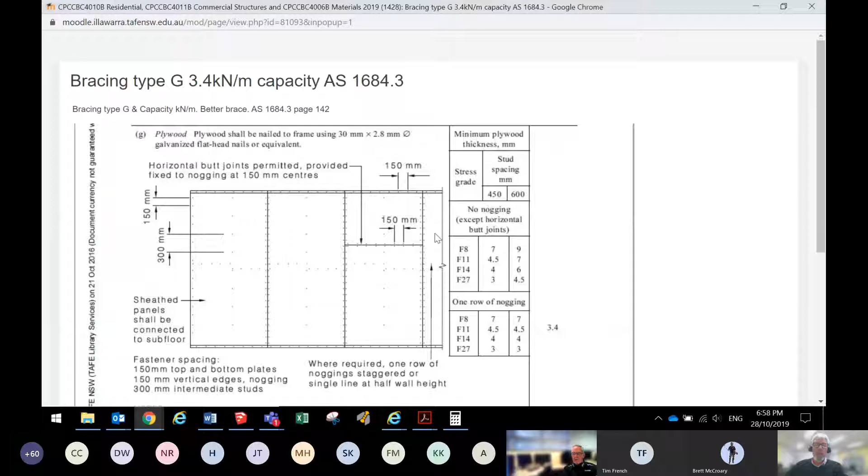In this particular case, that just shows us a G-type plywood bracing, and we're able to achieve whatever kilonewton is shown on the right-hand side here. You can't actually see it there, but that's 3.4. If we do all the things suggested on that page on the Australian standard, then we'll be able to achieve that particular kilonewton of bracing over that area.

Now here's an activity that I'm going to open up for you, and I'm going to show you my solution quickly. This one you don't need to fill in yourself, but I'm just going to open up the solution I worked through and quickly go through this one, because then you've got one that you're going to work on. You're going to have a student's little plan similar to the one I'm showing you, but with different measurements, and then you're going to do that and upload it.

And then you're going to answer the quick questions there. And then I'm going to just show this activity, because that's the last activity that we do here.

So let's just go through and get ourselves ready for the activity for tonight. Then you're going to do this one. I'm just going to show you the blank one that you'll be given. In this particular case, you're given two questions.

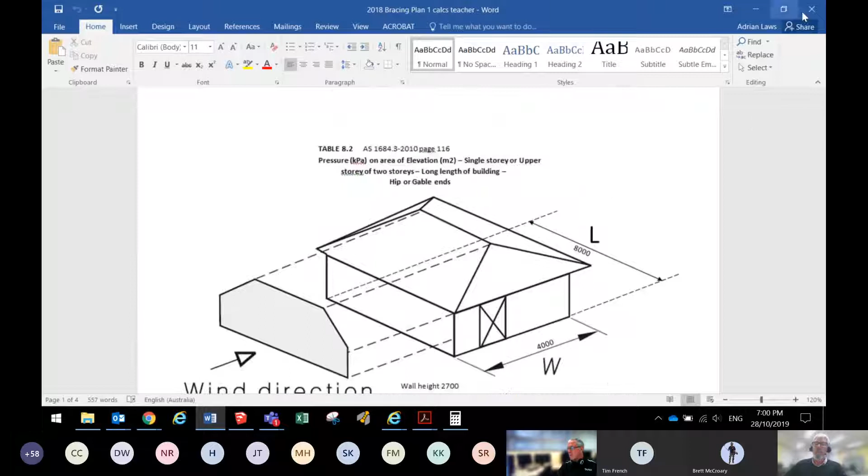And I'll just shut that one down, and then I'll open it up on here. I'll work through this one with you. That would have been better if that opened in another window.

That one there I'll show. I've shown that one, so you've got it now. This one here would be one that I would save into my file, ready for exam tips, because this is going to go through some bracing.

Once we've been able to work out what our wind loading is, this is going to go through how we can work out our bracing. So in this particular case, this is set out asking you the questions about how to fit your bracing in.

In this particular case, we've got a bracing plan, shown in a picture here, and we've got step by step how to work this through. And then here's some information in the box on this side, which pretty much tells you where this comes from.

It's told us that we've got a C1 classification, and first, in this activity, we'll be working on the long length of the building, working out what bracing we need across the building to resist the wind coming against the long length of the building. So I've put in here: bracing plan 1, across width of building.

So on the wind, if the wind's on the side of the building, we've got a 25-degree hip roof. We've got a C1N2 type wind rating, which has been given to you. We haven't actually calculated that yet. We've got a wall area.

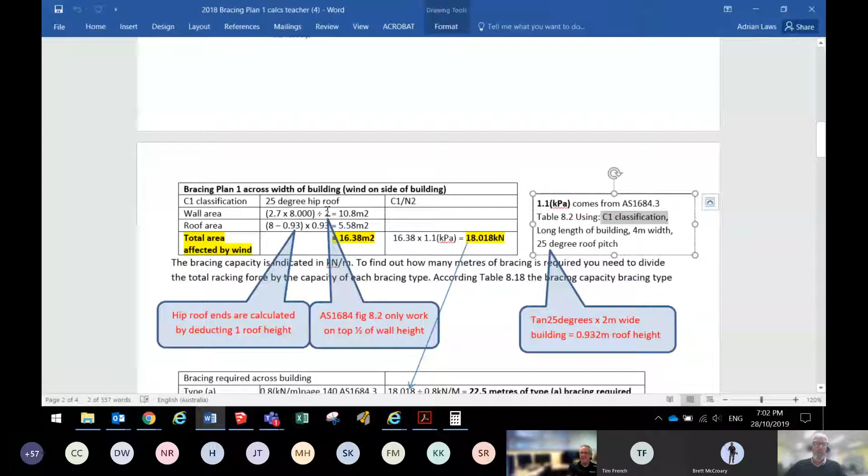And then we come back here and we divide that by 2, because back on Australian Standard 1684, it tells us that for the area of elevation, we only take half the height of the wall. So we take our wall there and we only take half the height, because the bottom — remember from one of those diagrams I showed you — the force goes down from half of the wall down to the floor. So we only have to take half.

That's where we divide it, and that comes to 10.8 meters squared. So that's the actual area of the top half of that wall where the wind's going to blow.

Okay, and then we come back down to our little calculation. Now it's handy to set it out on a chart like this, because it means that we don't forget things as we go through. And that's where I put that note in for you.

Now with the roof area, we take the length of the roof and subtract the height of the roof — that's as in the rise of the roof above.

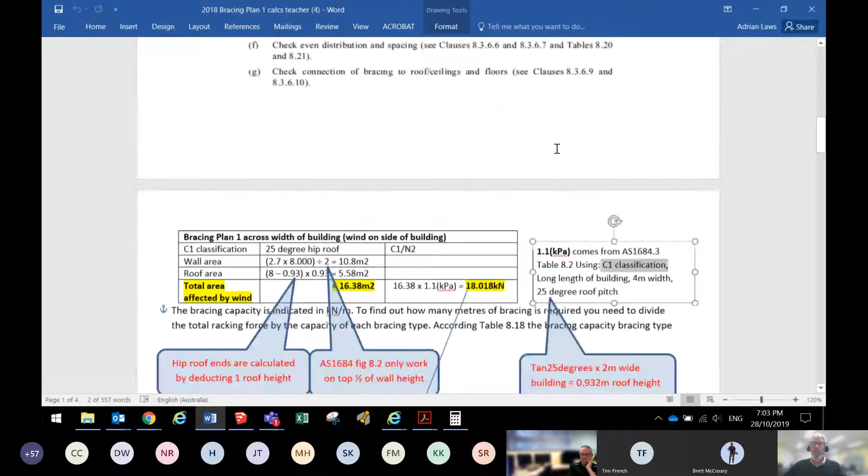You might remember from your roofing calculations that if we know the slope of the roof and how deep it is to the middle of the roof, we can calculate the rise of the roof. I've put the calculation in here for you: working on 25 degrees, tan 25, times 2 meters wide, because this building's 4 meters wide so we're only going 2 meters in. That gives us a rise of 932 millimeters for the roof height.

So if we've got a roof that's 8 meters long, we have to take off 932 millimeters because of this reason: looking at the short end of the roof, the height of the roof is 930. If it's 4 meters wide, to work out the area of that roof, we basically need to reduce that back to a square. I'll pop a square on here to show you what that looks like.

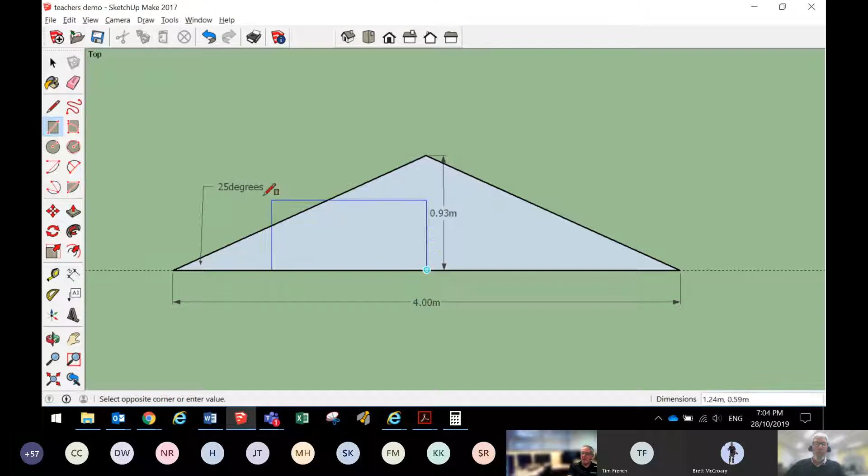So we come in here, and if we halve that again, we can basically turn that shape into this shape, and then you'll find what we've got is the area of the triangular end of the roof. So if you look at the end of the roof, in our calculations we subtract whatever the height of the roof is, and that allows for the little bit of exposure on that end to come across to here, forming it into the surface area of the roof. I've done that calculation there for you and explained why that triangle gets taken into account like that.

So that's 8 meters minus the rise of the roof, times 0.93, the rise of the roof, because it's not actually 8 meters of roof, and that gives us our square meters of exposure to the wind. So if we looked at the side of the building, that grey part is 16.38 meters squared. Now we've been told to use 1.1 kilopascals as the pressure that's going to occur on that building.

So 16.38 times 1.1 is 18.018 kilonewtons. So on this particular house, 4 meters by 8 meters, we have to have just over 18 kilonewtons of strength for all these cross walls spread evenly throughout that house to be able to resist that wind.

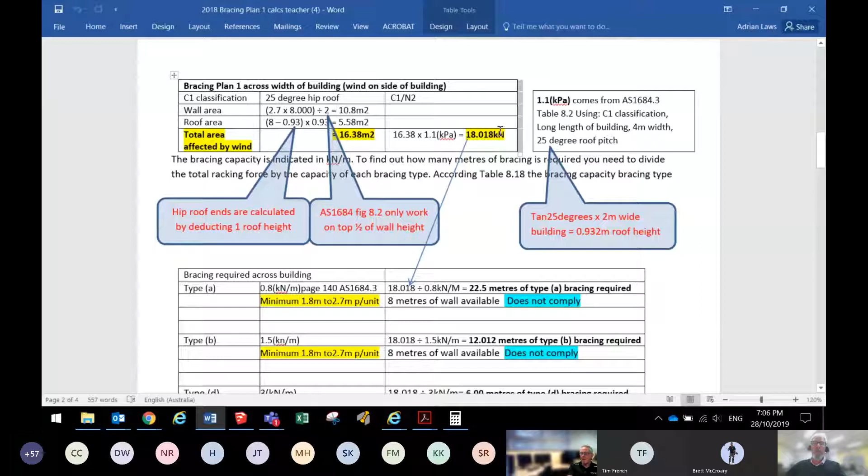Now, we haven't actually done the maths on it here, but I made a note down the bottom that 50% of that strength, about 9 kilonewtons, can come from the normal sheeting that would be on that house. So if that was a brick veneer house, we'd have single sheeting on the inside of both end walls, double plasterboard, so we can have 50% of that bracing. That means we'd have to allow for 9 kilonewtons of bracing structurally. In this example, we're just taking that 18 and looking for a type of bracing that will give us just over 18 kilonewtons.

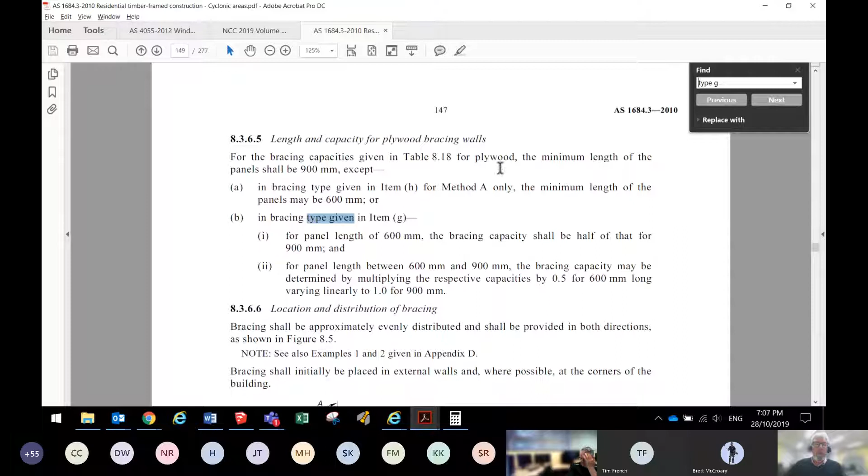In this exercise, what Brett's done, and I've worked through here for you, is look at type G bracing. We looked at this a little bit earlier. I'll go find that one. Here's our type G bracing. Actually, that's going to search for way too many things. We come down here till we find type G bracing.

Back up on 8. Type G bracing is plywood or masonite type bracing. Somebody can find the table and just type it in. There it is, I think. I know that's N, G, H, I, J, so back a little bit. There's type G bracing. If we use this type of bracing, that's plywood, using all that information in that table, we're able to achieve 3.4 kilonewtons per metre. It says here that this type G is a minimum.

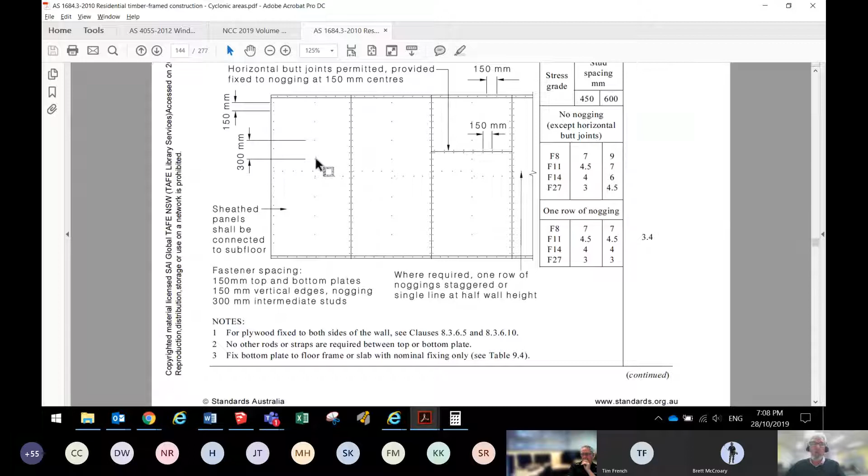Somewhere here it says what the minimum is. Normally it's 1.8. So if we have a wall height of 2.7 meters high, then we can probably try and find runs on our plan of 2.7. Well, we can, if our sheeting's 900 wide, then we can go 3.4 times 0.9, and if we have a couple of sheets together, we'd be able to achieve a fair bit of bracing there.

So what we've got set up on the table here for you is if we can get 3.4 kilonewtons for every metre, we need 18.018 kilonewtons. Divide by 3.4 means we need 5.299 metres of wall that's available in that plan to be able to have some bracing. If we need 5.299 metres, then how do you reckon we'd go on this job?

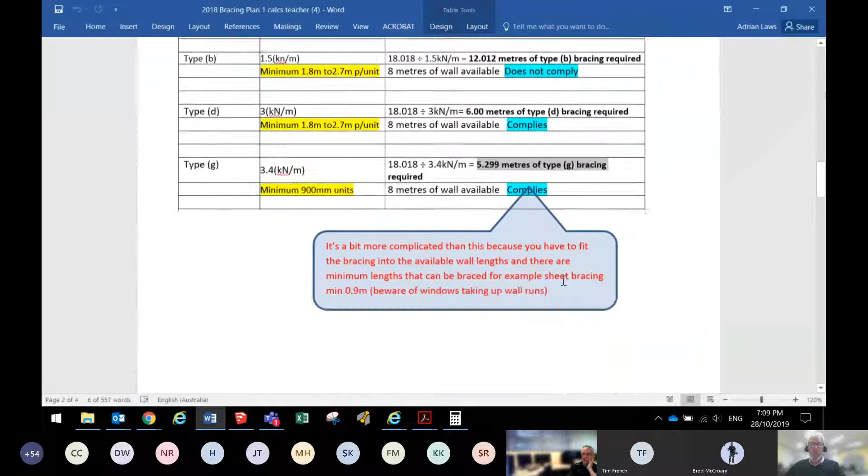Okay, so it's real important to remember that 50% of our bracing might be able to be claimed as nominal bracing. And we have to also allow for the fact that sometimes bracing has a minimum length that we can run. So for ply bracing or sheet bracing, it's normally 900. For structural bracing that runs on the diagonal, we have a minimum, and you can see here it lists this particular type of bracing, anything from a minimum of 1800 to a maximum of 2700. And that's been indicated for you in this particular table here where Brett's put in there 1800 to 2700, and this one's in 900 millimeter units.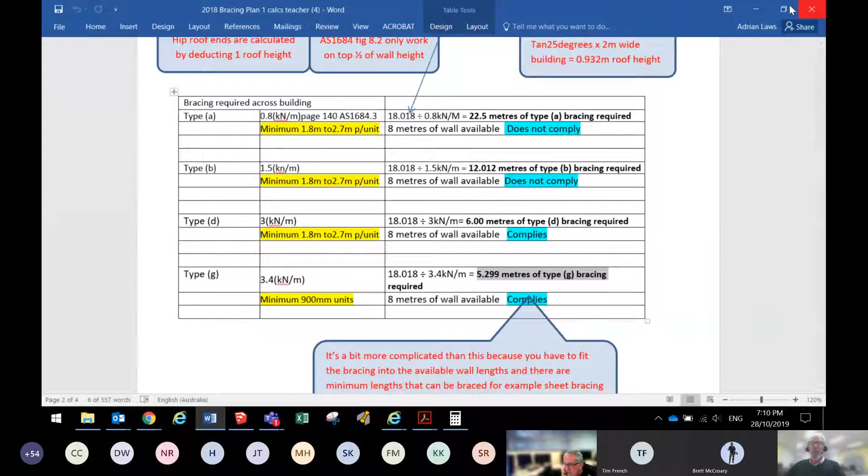So this can help us to be able to plan how much bracing. This is the end result of us doing all of our work in bracing, and then we have to do the same thing for the wind blowing against the end of the building. This time the bracing is going to be the long way of the building. So the bracing plan in this particular case for plan 1 is along the length. The bracing is along the length of the building, and the wind is on the end of the building. So we have to do all our calculations based on that.

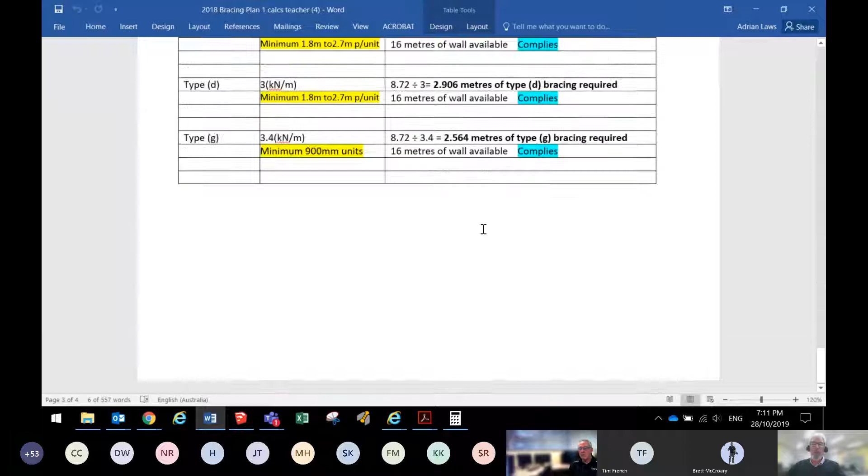The wall area is going to be 2.7 meters high for the wall, times 4 meters wide, because this building in this example is 4 meters, divide by 2, so we just get the top half of the wall, 5.4, and you can see that an example of how that works. And there's lots of different ones there that comply, because we're only looking for 8.72 kilonewtons in that one. Now, that little example is a real good way for you to be able to do your

exercises with you when you do that, the activities here. And I've made both of those available to you, so you can see an example of that there. And what I want to do next is open up your activity for you to do for tonight, and that's an example of pretty much that what I just showed you on the Word document. That's all opened, but you just have to put your own calculations in. So you can see here it is. It's pretty much what I just showed you on the Word document, but you've just got to put your own calculations in. There's your measurement there.

In this case, it's 7 meters by 5 meters. Just check every single thing there and make sure that it's all right. So you can't just copy straight from what I gave you. And I would suggest you use that one I gave you and type in the same sort of information as you go. Do all your calculations. So you've got the side of the building, you've got the end of the building, and there's your calculation. So this one here is your bracing plan for the long length of the building. This one's for the short length, and your job's to go through and fill that out based on this one that I've made available for you.

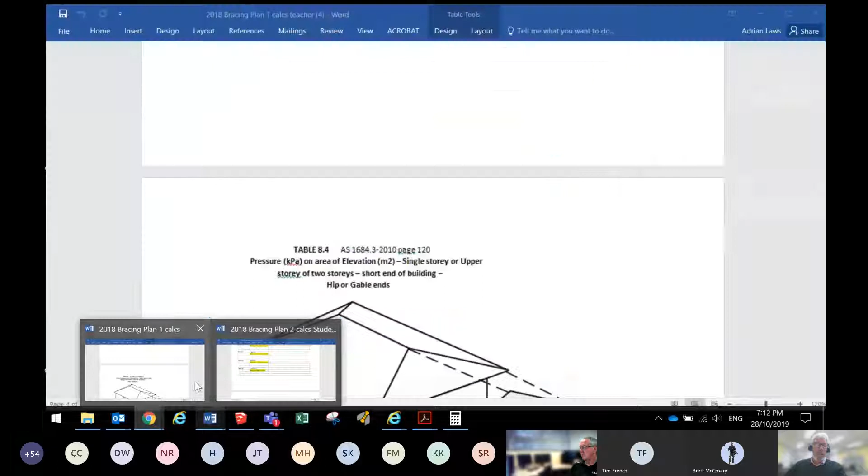Then when you finish that, you can upload it. And then when you finish that, you can do the quick quiz, which won't take you very long. And to do that, now these will be open for a couple of nights, so you're not going to necessarily finish all of this tonight, but work on that and make sure that you upload. Now, do watch out for the people who just upload a blank document. It's going to catch up with you. When we get to the exam at the end, pretty much if you have a completed activity sheet that's done, then that's going to be so much easier for you to be able to go through and do the work quickly for your exam. So you can have access to all this sort of stuff and then be able to work it all out.

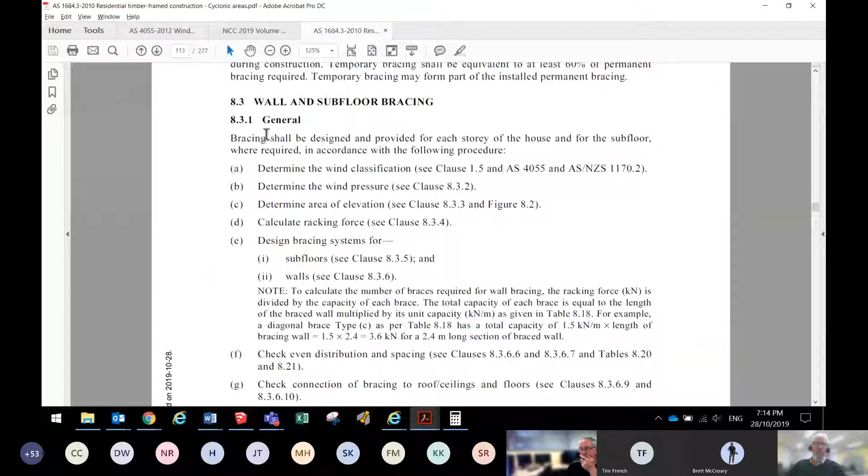Pretty much, I would say if you only want to remember one thing, then ditch everything and write down 8.3.1. If you can do 8.3.1, you're going to be able to do wind bracing and tie downs and everything. So the question that Tim's asked is related to point C, which is determine the area of elevation.

To do that, I'm going to just go and show you graphically, Tim, with figure 8.2, where you'll find - here we are, 8.2. I'm just going to go to the bottom of 8.2, make sure we know what all of 8.2 looks like. And you can see there's 3 8.2s, there's A, B, and C. Now there's a note here that talks about the eaves, and the overhang, which Tim's asked.

Basically, the answer is no, we don't allow for it, but I'll just show you where it is here. It's probably note 3 on each of these A, B's and C's. It says the area of elevation of the triangular portion of the eaves overhang up to 1 metre wide may be ignored in the determination of the area of elevation. So that little triangle in the end, you don't worry about it. You can see the area of elevation there. Any other quick questions on this?

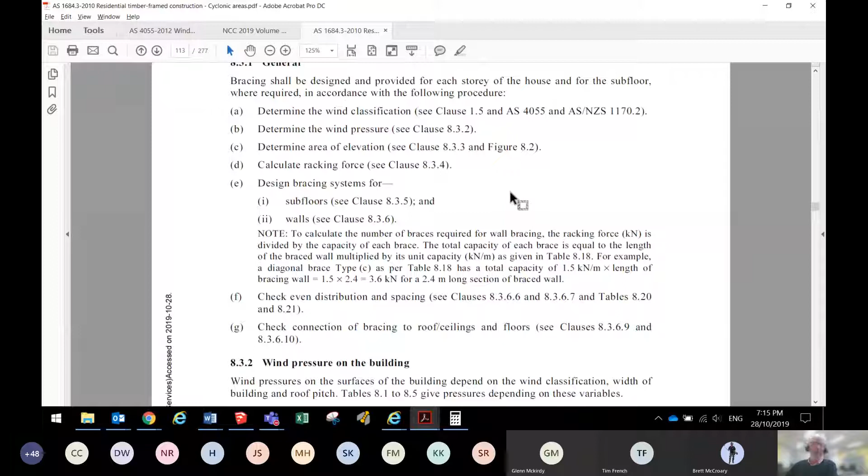The way I always taught this unit over years and years and years is I would say to somebody, just copy that wording right there and put that into a Word document. So just copy that, put it into a Word document like that. Open yourself up a Word document, and this might help some of you if you're feeling a bit confused. Just stick that into a Word document there and then just go through and do it.

Okay, so in this particular case, determine the wind classification - you're going to have to go to 4055 and do that. There's a few videos on that, but I'm going to do a little session on that probably tomorrow night or whenever I can on it.

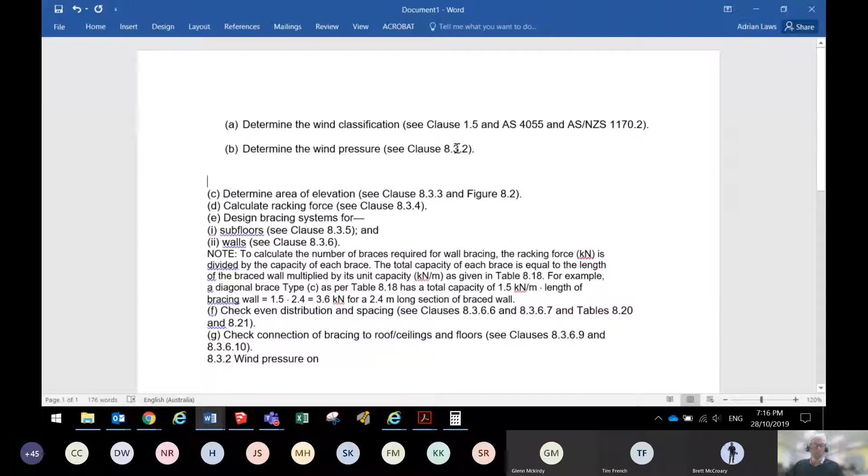Determine the wind pressure - in that case, you're going to go to 8.3.2 and you're going to do what it says on 8.3.2. Okay, and you just go through and answer it with your plan beside you. Here's 8.3.2, the wind pressure, and it says there, go to table 8.1 to 8.5. 8.1's down here somewhere.

Table 8.1 to 8.5, and you'll be able to answer this. So maybe that'll make it a bit easier for you if you're feeling a bit too confused. You just got to go through and follow it step by step, following through that information there. Any other questions?

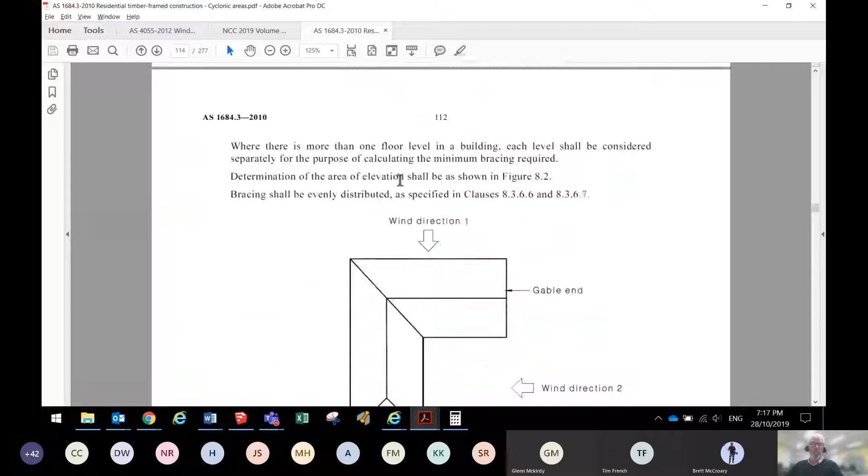Exams on the 28th, I think, or has there been an adjustment made? Kamal, it's on the last Thursday. Kamal's asked a question there, the exam, that'll be on the last Thursday, which is - let's have a look when the last Thursday in November is. That's the 28th.

It can't come quick enough, I agree. 28th at 4:30, Andrew Falk said.